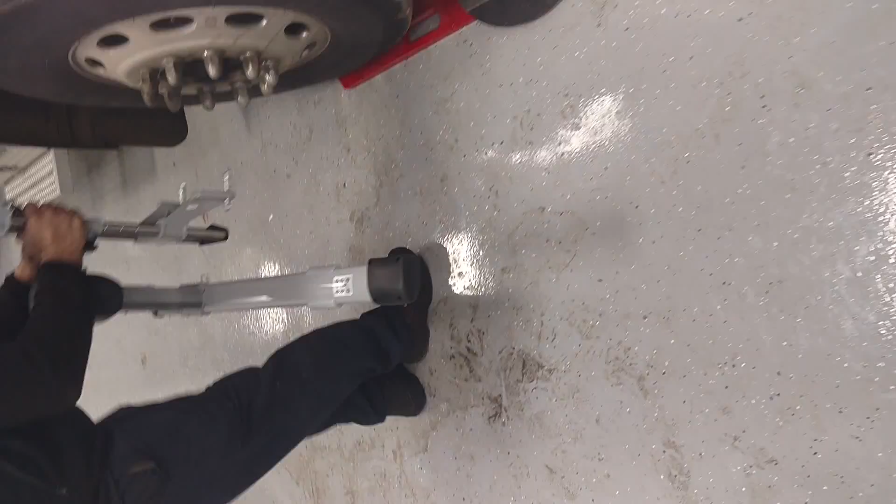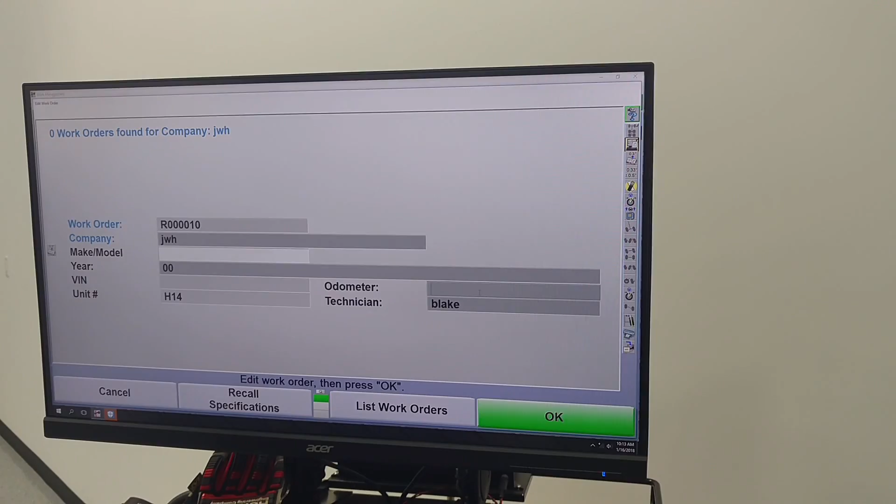The year you only put in 2 digits. You want... And you can put in the VIN number if you guys like to track VIN numbers. Most of my customers use the last 6 or the last 8, but it's not necessary. Just the dark gray is mandatory. The light gray is non-mandatory.

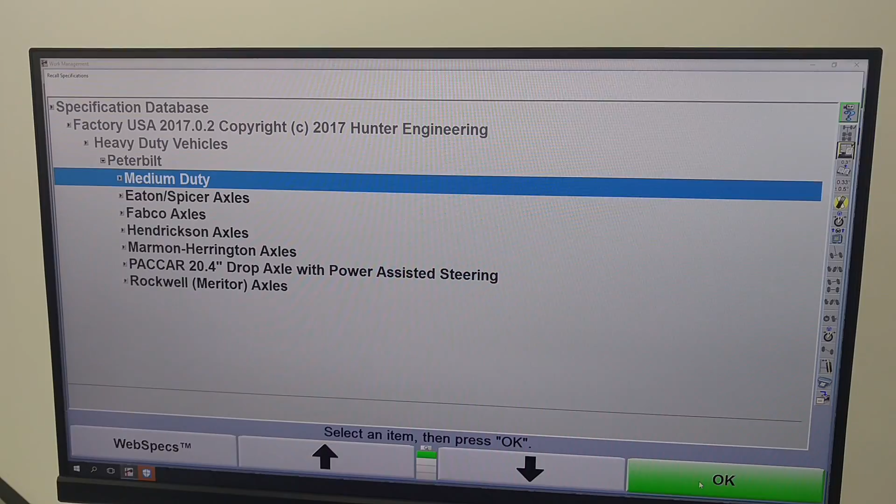So the space bar takes you to heavy duty vehicles. And then we click on that and we open it up and then we look for our selection. We're working on a Peterbilt, so we can touch P for Peterbilt, and then we just look for our axle code on the truck and open it up and choose the proper axle.

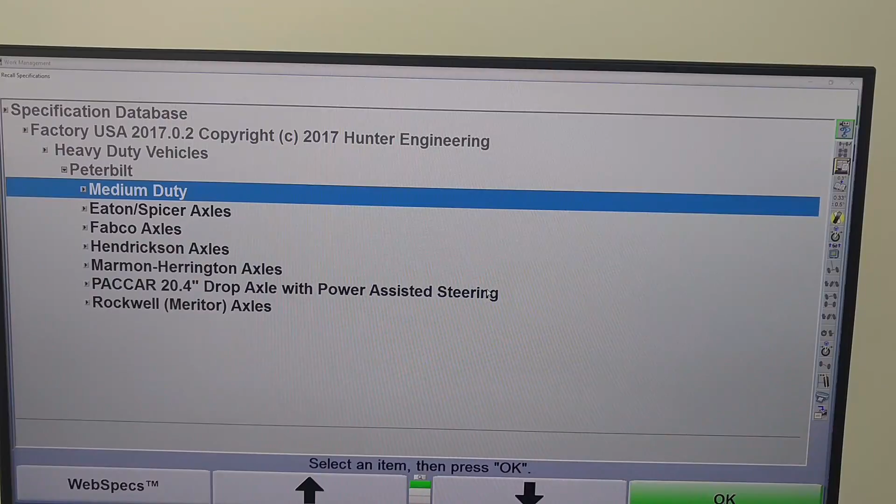On the older trucks, the tag was on the front axle out of aluminum riveted on there, and it stayed for a long time. But newer trucks now, they put paper tags, and they only stick around for a couple of years. So if you can't find the axle code, don't beat yourself up. Just pick the closest thing you can. The specs for toe are all very close.

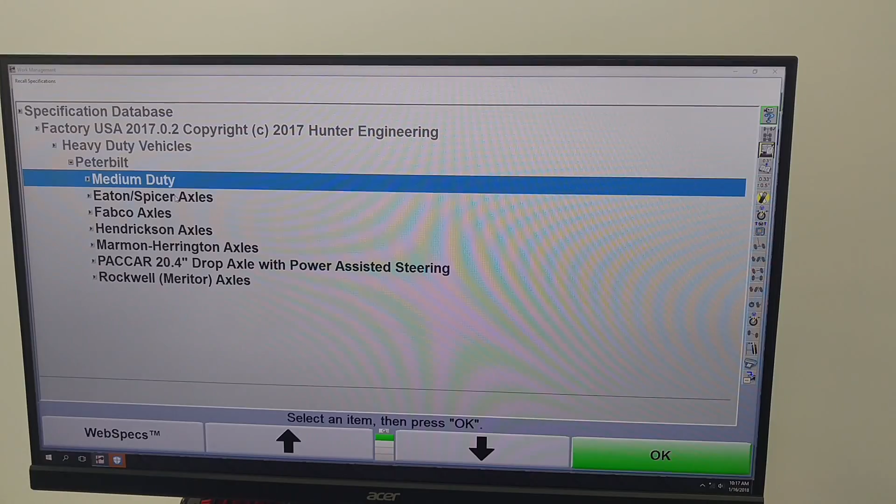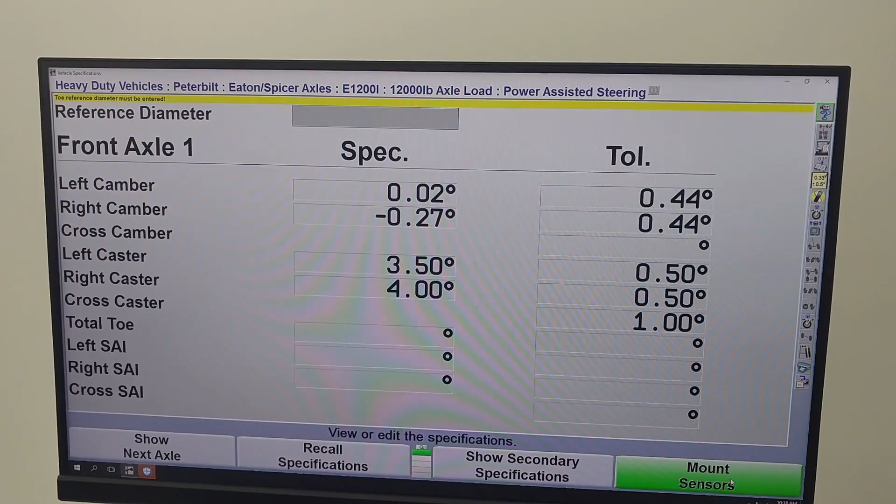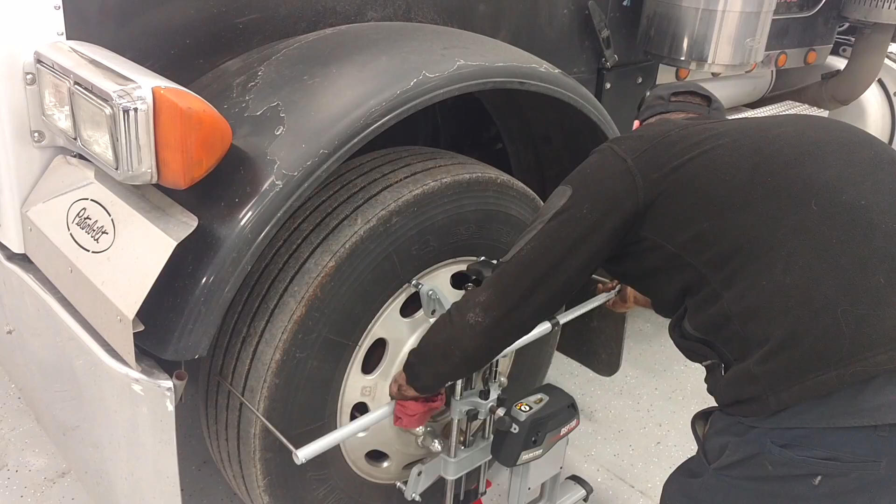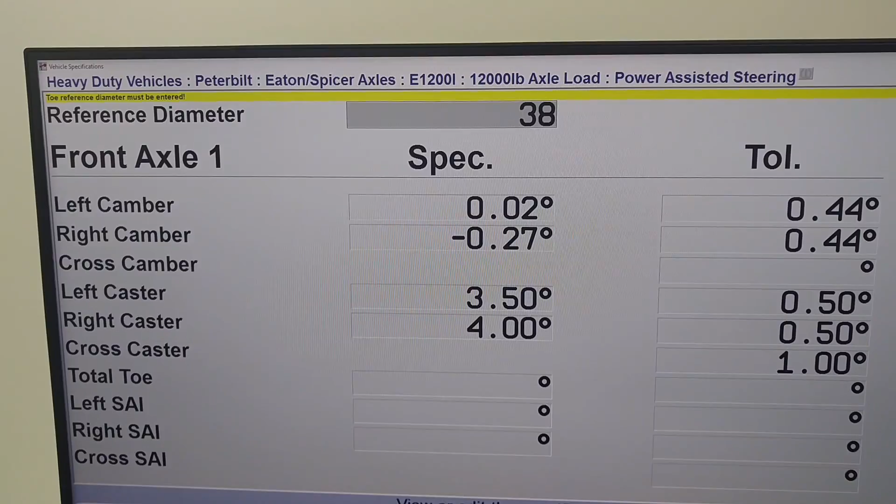Alright, so at the top of the screen we've got that yellow highlighted bar, and it says toe reference diameter must be entered. What we need to do is measure the diameter of the front tire with the tire measuring tool. So we're just taking the overall diameter of the tire with that tool. 37, 38. And then we enter that in that box, and you'll see that it populates the toe. It'll populate total toe when you hit enter.

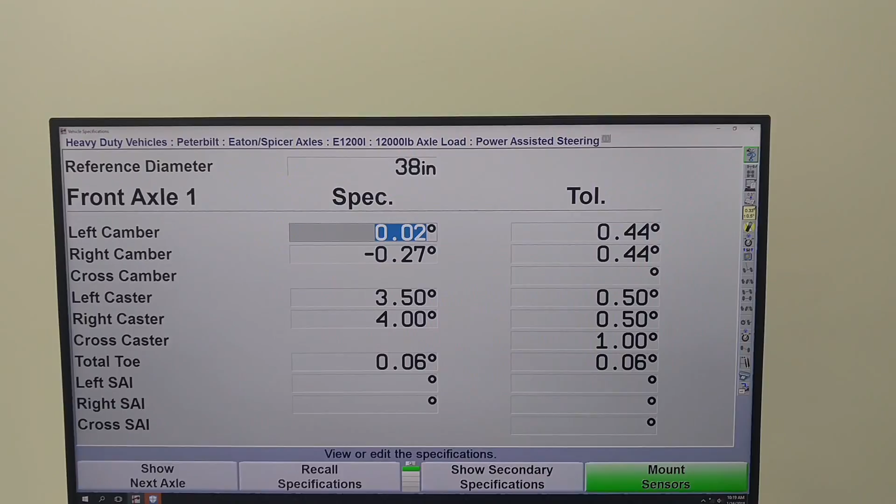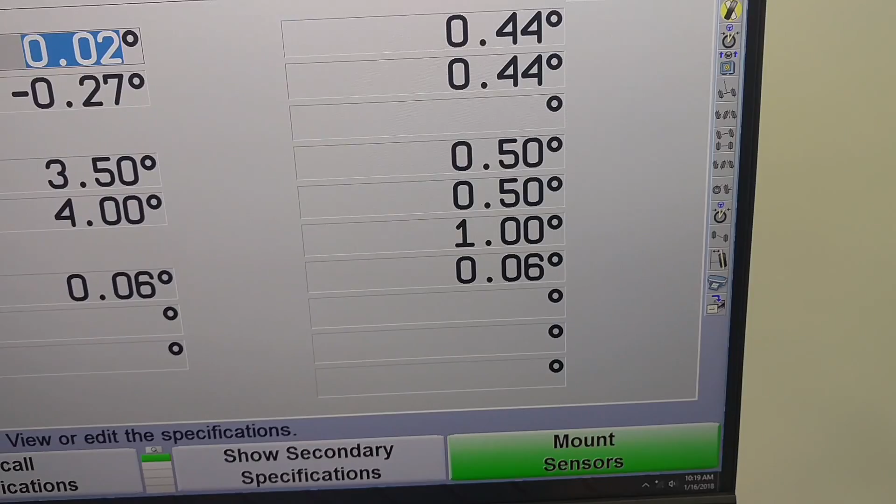So if you are ever doing an alignment and your toe spec is gray instead of red or green, it means that you did not do that. And you can go back up on the procedure bar on the right hand side of the screen, and you can go back up to show vehicle specifications or recall vehicle specs. Yeah, show vehicle specifications, and it'll give you an opportunity to enter that if you need to. Okay. So now you just go to the next box, which is mount sensors.

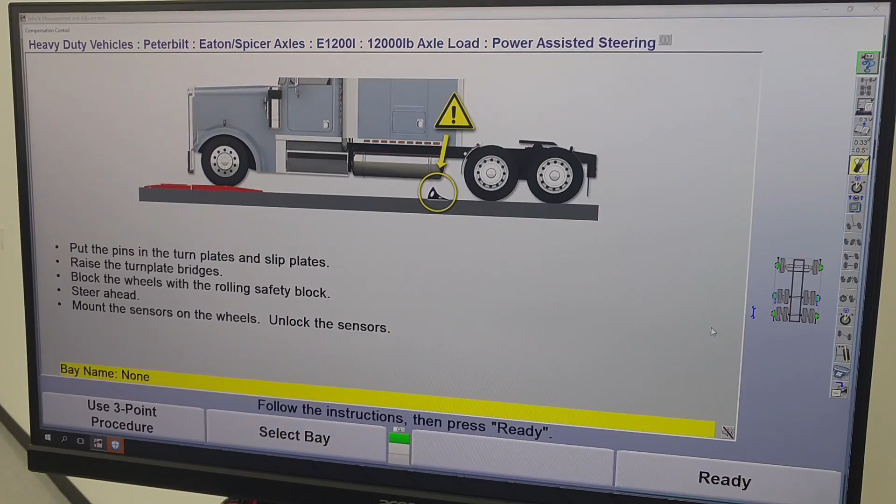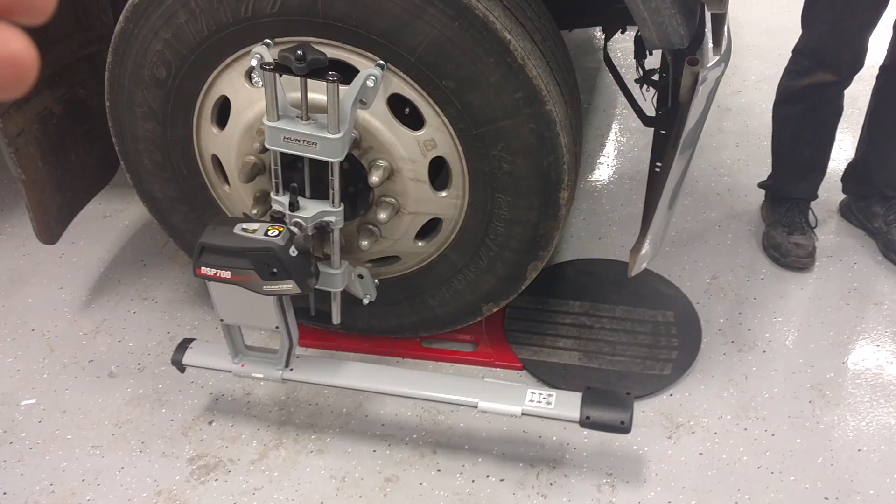And these particular turn plates don't have pins or turn plate bridges, but we make sure the wheels are steered straight ahead and the sensors are mounted, they're unlocked, powered up, and we drove the truck in and we centered the front axle at 22 inches back from the turn plates, which there's a black mark there that designates that. And then we hit ready, and that should give us 6 red bar graphs on the screen. And now we just need to roll the truck forward to compensate the sensors.

As long as they have to listen to your corny voice and not mine.

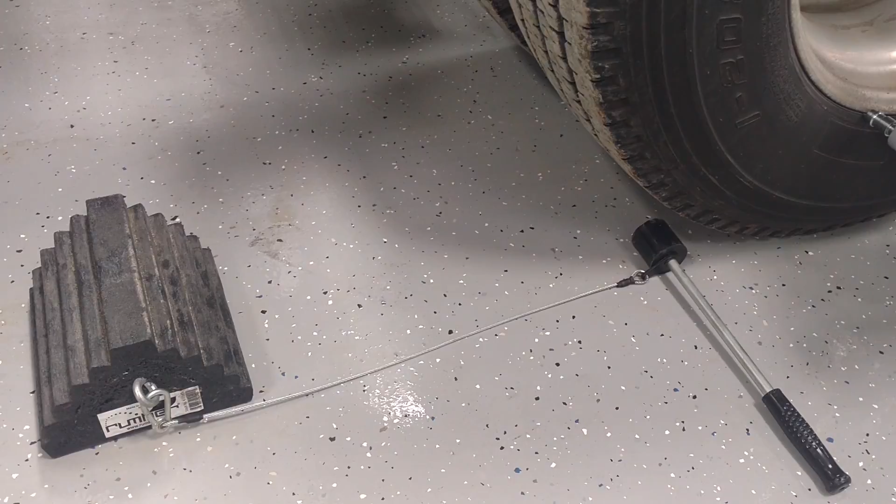So what we've done is we've spaced this wheel chock out at 22 inches using that little drumstick as a spacer. That gives us 22 inches of roll forward, and we just need to remove that wheel chock back there to let the truck move forward. Yeah. And being as we're down here a little bit, it may move. If not, just push it. Go ahead and push it, that way you can see it.

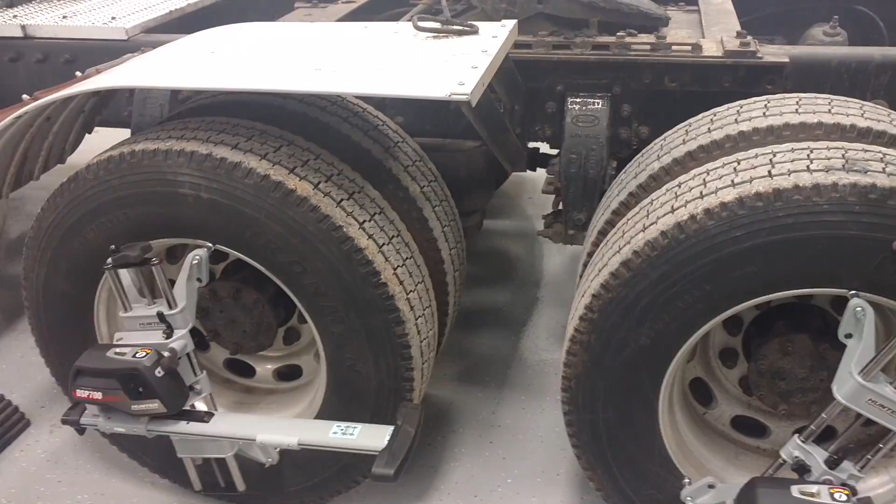So we roll the truck forward. Now we've got 6 red bar graphs that turn green. So we've compensated, and now we've got our numbers.

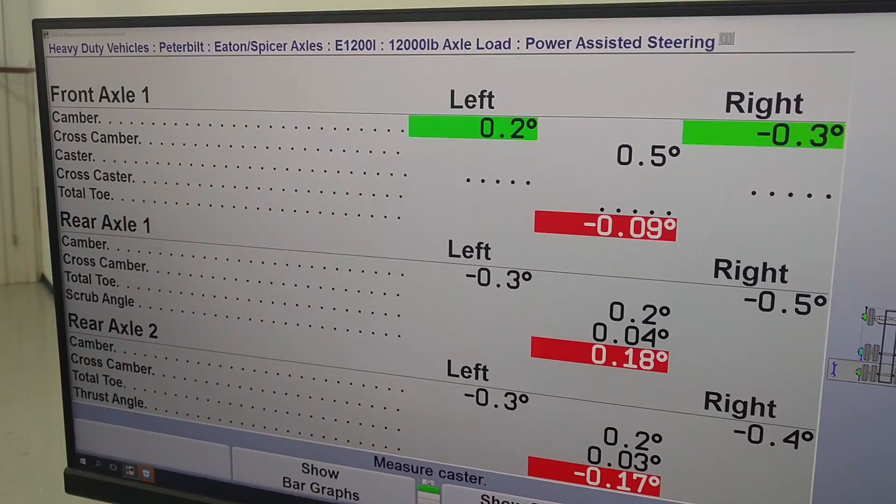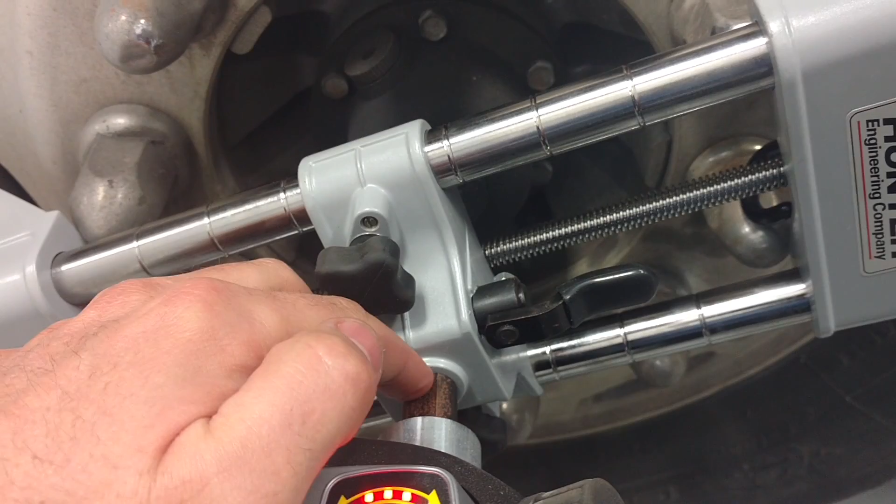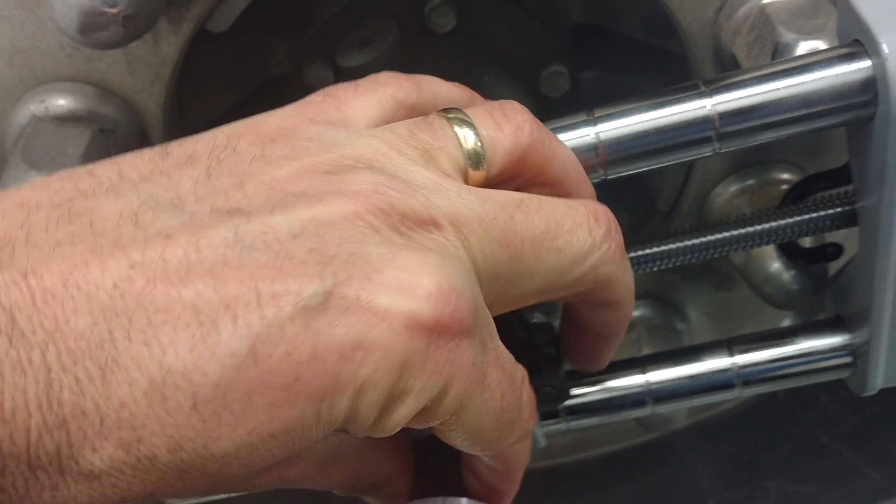Now, on that bar graph screen, if you ever get one that turns red and never goes green, chances are one of these sensor extensions into the casting is not tight. So it means this butterfly right here is loose, and this sensor shaft can rotate in there and it will not compensate. So you always make sure that these are nice and tight.

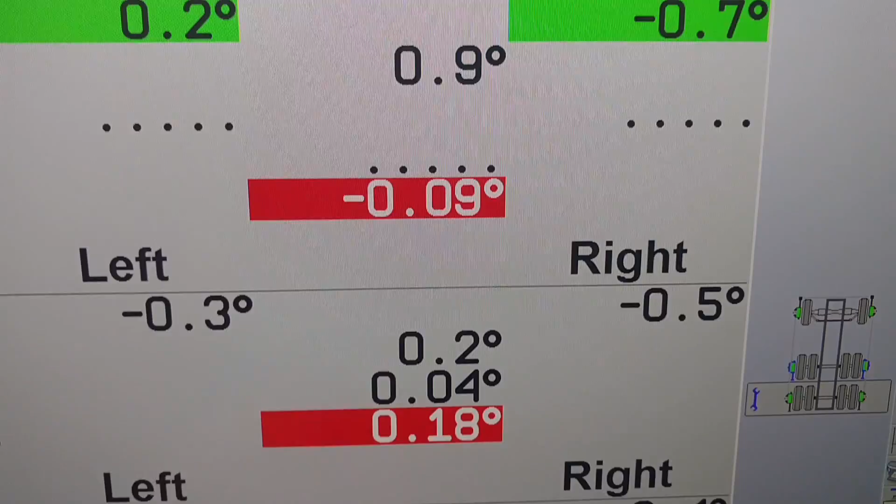So now we've got our numbers on the screen, and we've got thrust angle, scrub angle, and our total toe. Alright, and remember how I was telling you that scrub angle is referenced off of thrust angle, and if one is negative and one is positive, they will absorb into one another.

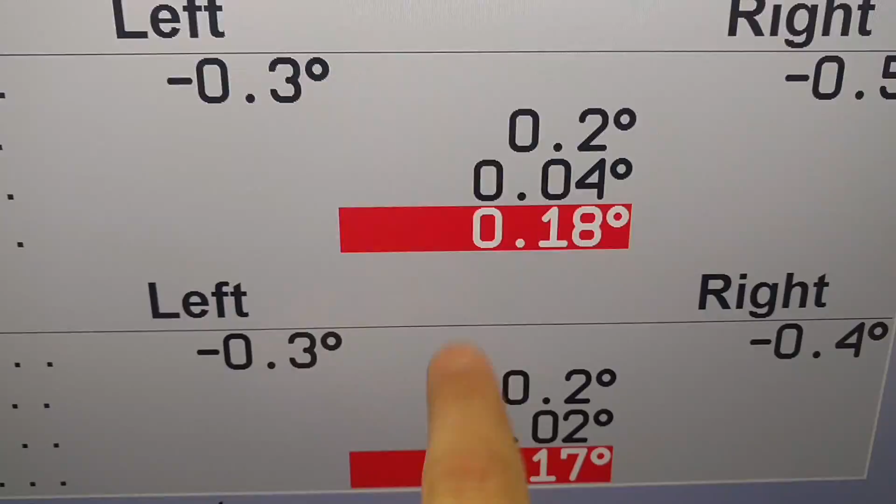So scrub is referenced off of thrust angle. So when you change thrust angle, you're going to change scrub angle also. So in this particular case, because this is a negative and that's a positive, when we fix this thrust angle, it's going to fix that scrub angle also.

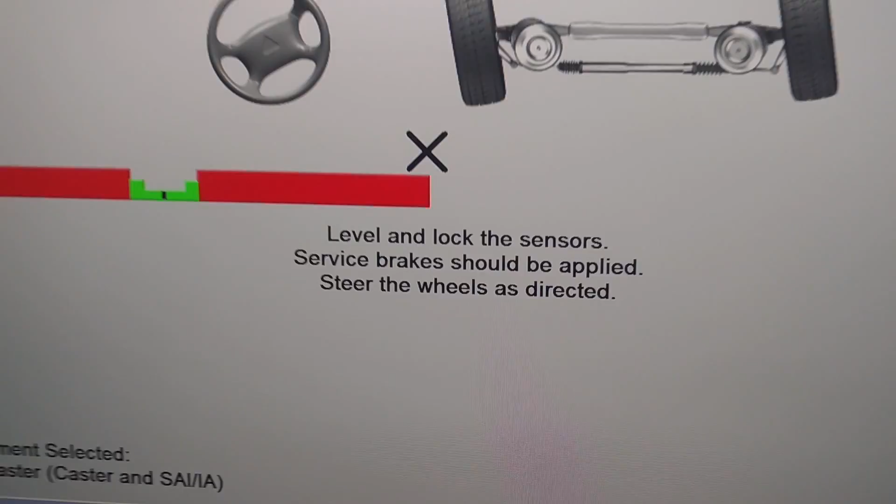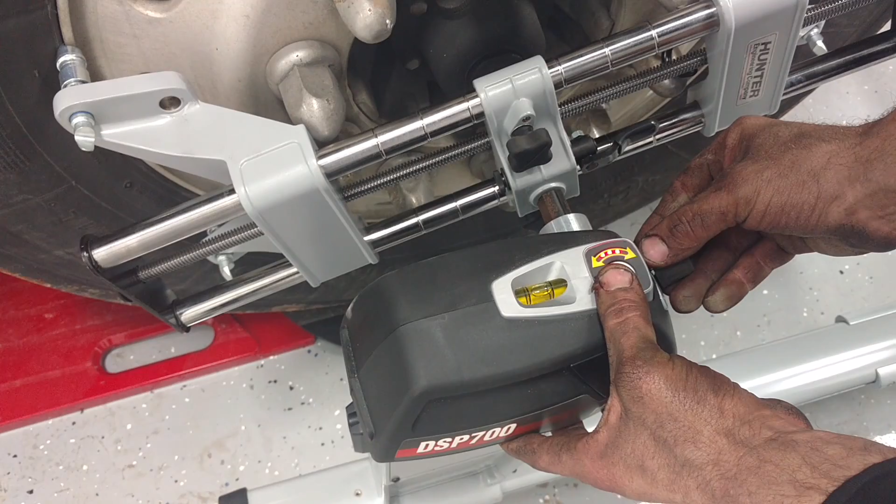So go ahead and hit measure caster. And the wheels were steered straight enough ahead that it's going to automatically take that, I believe. Yep. So now we just need to level and lock the front sensors and then steer for caster. Okay, so the wheels were steered straight ahead and it automatically took the first part of steering for caster. He's leveled and locked the front sensors.

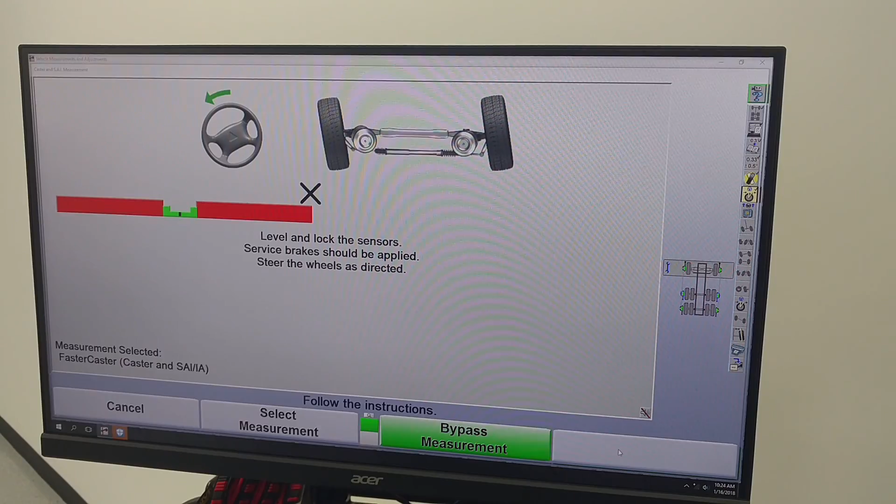So now he's going to go ahead and steer the vehicle to the left and get in the green bar graph. And that's about half a turn on the steering wheel. Just hold it in the lower part of the valley for a second. It'll take that measurement, and then we're going to move to the right about one turn of the steering wheel, and that will get the other bar graph in the green.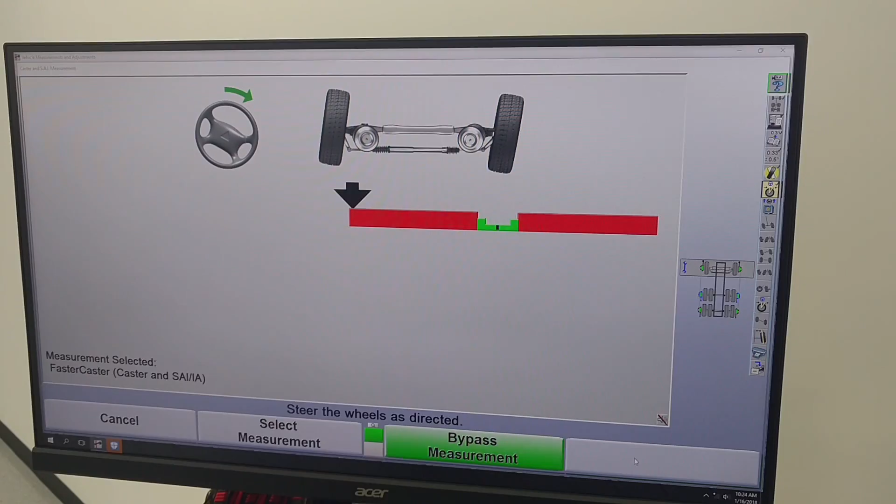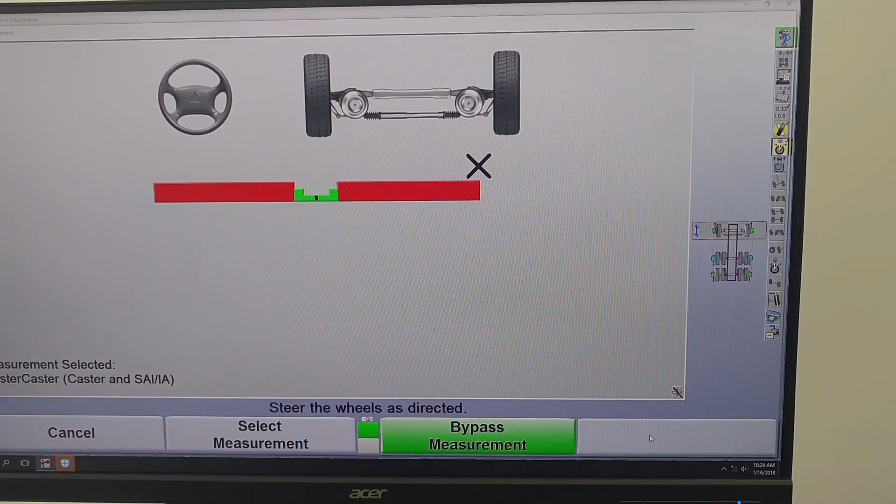And then after it captures that, we're going back on center. And this is very touchy. The machine is always about 2 seconds behind you, and you need to hold it in the lower part of the green valley for about 3 to 5 seconds, and then it'll measure and capture the caster.

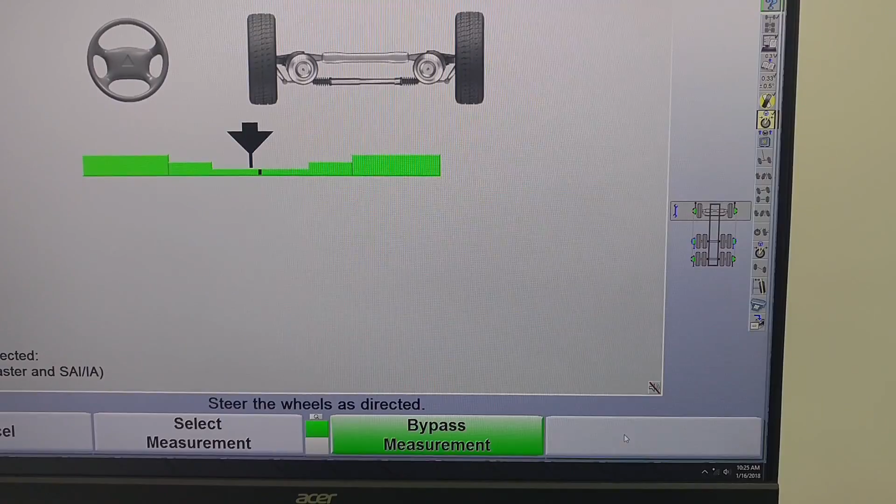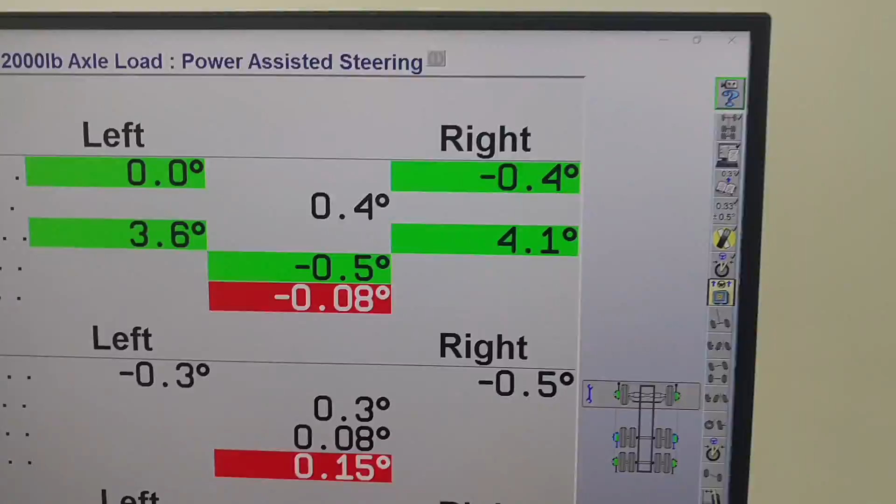So now we've got our measurement screen, and it shows our caster. We've got 4.1 on the passenger side, 3.6 on the driver's side. So we've got a perfect half a degree caster split, which will help this vehicle for road crown, because the truck will always pull towards the lower number caster if the caster split is over half a degree.

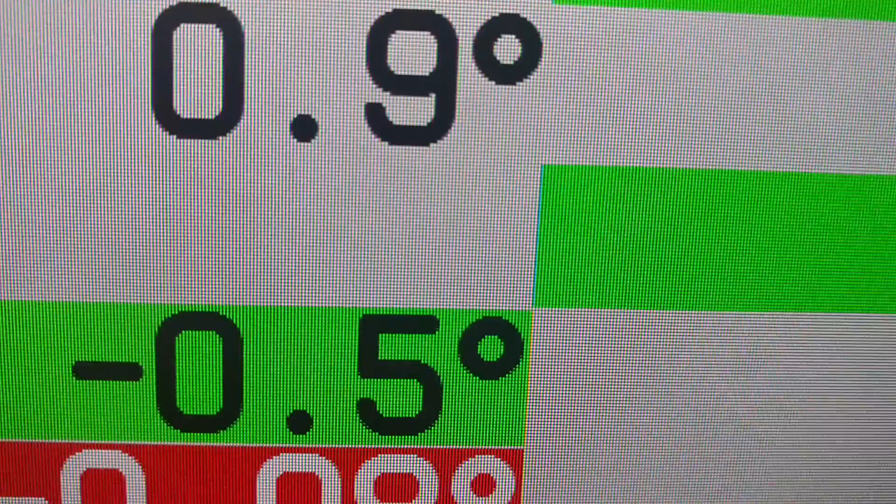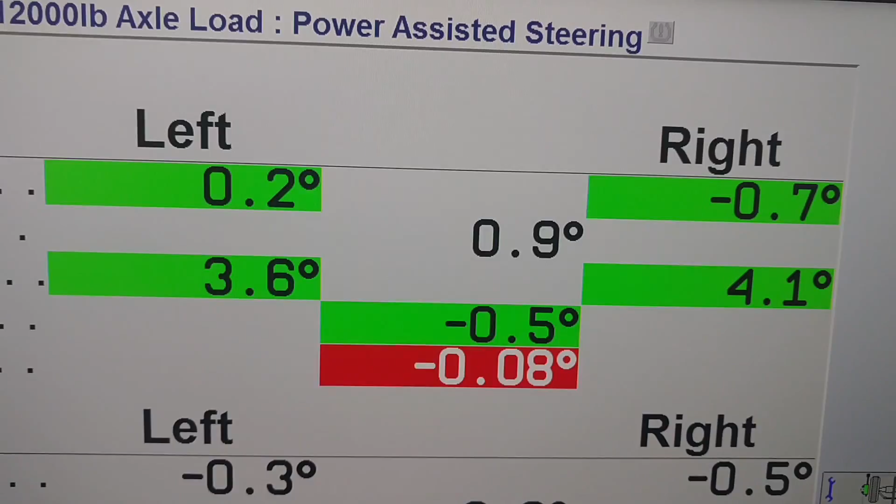And that's your caster split, half a degree, and that will help the truck up the hill for road crown. And in certain cases you may have to have a 1 degree caster split to keep the truck from pulling, but most of the time half a degree will do it. So now we click Save Before Measurements, and we can set our steering wheel status here if we want to notate if it was level before the alignment. So we hit ready.

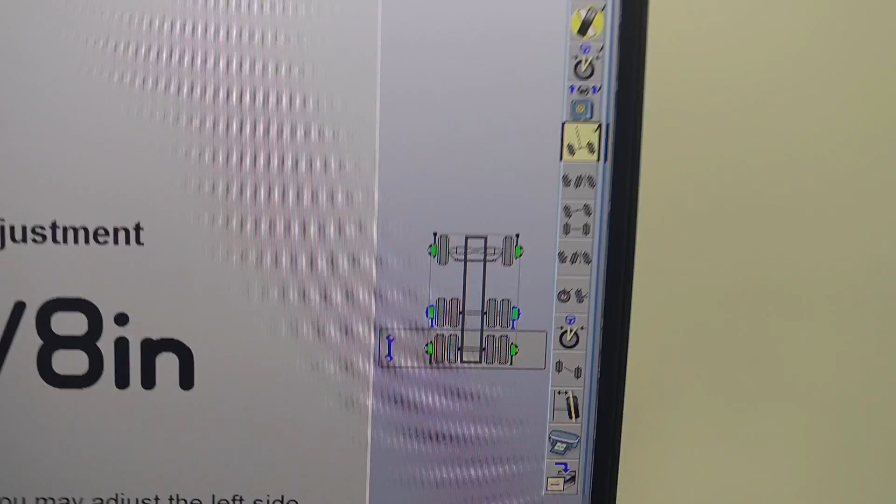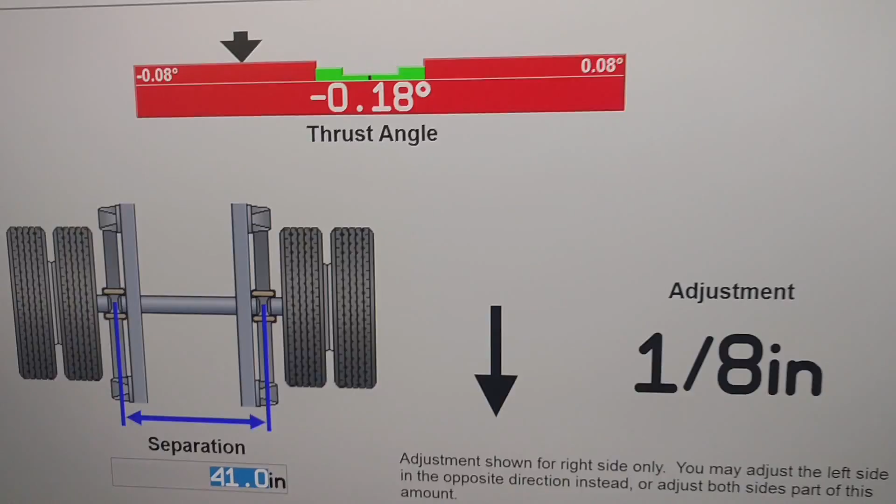And we've gone to thrust angle now, and we know we're working on that axle because of this highlighted gray box with the wrench next to it on the rearmost axle. So this thing has got negative thrust angle, which means it's on the driver's side, so the axle is pointing forward on the passenger side, well, about 1/8 of an inch. So we need to move this axle back on the passenger side, or that side of the axle has to come forward on the driver's side. And we would just look back on the truck to see how we make those adjustments.

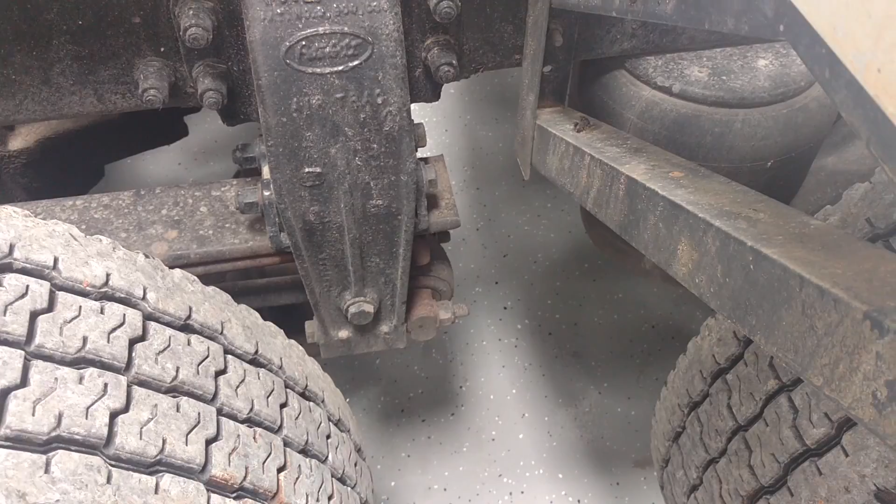Okay, so we've got negative 0.18 thrust angle on this. This is the passenger side, and we've got some washers in there that we can take out, which will be about 1/8 of an inch, and we can square up thrust angle on this truck. Did you guys measure that?

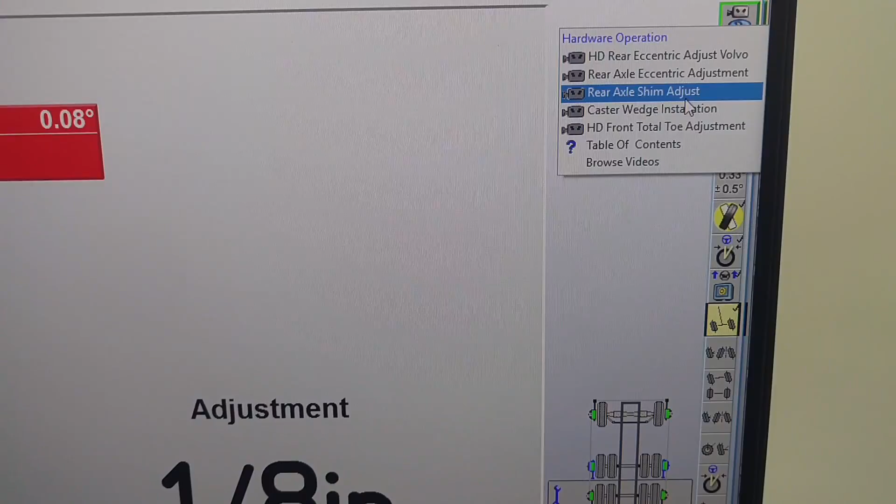Yeah, so now I've got browse videos at the top of the screen, so I hit that question mark, and I can come down to rear axle shim adjust, and this will show a video of how to adjust that rear axle.

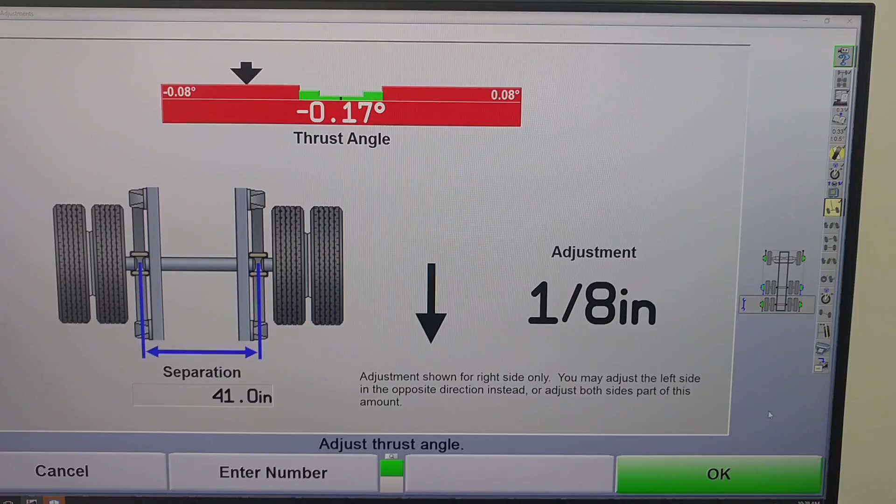Alright, and one thing I do want to say here, when you make that adjustment, if you make more than 1/8 of an inch adjustment, you definitely want to jack that rear axle up and get both tires off the ground and relax it and set it back down, because with the tires on the ground you won't get all the movement of the axle. You'll gain another 2 to 3 hundredths just by jacking it up and setting it back down.

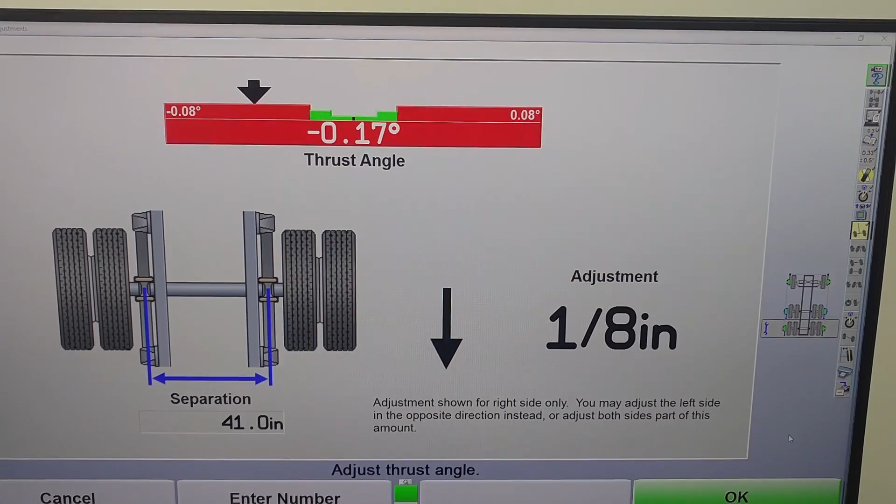And one other thing I'll mention with that is, for y'all that have a tight turn into your alignment bay, it's important that the truck be straightened out before you do the alignment on it. So you may have to back it up as far as you can and get the axles in the forward running position just like it goes down the road.

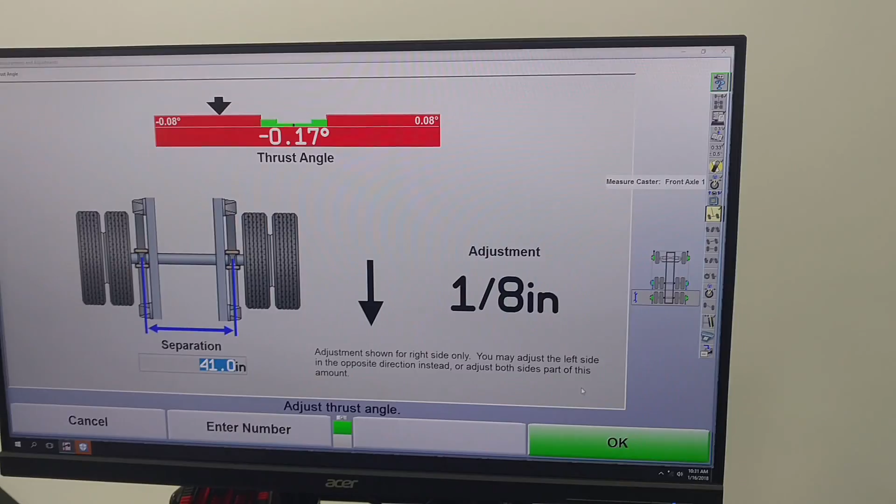So once we would make the adjustment, that would turn green and we would look for like 0 inches, and then we would hit OK, and we're going to go to the next screen, which is camber and toe numbers on that rear axle. And it's very important on rear axles that the total toe is what we're looking for. We can identify a bent rear axle, and the total toe number at 0.50 or higher would designate a bent rear axle, and that thing will be a tire eater until it's replaced or straightened out.

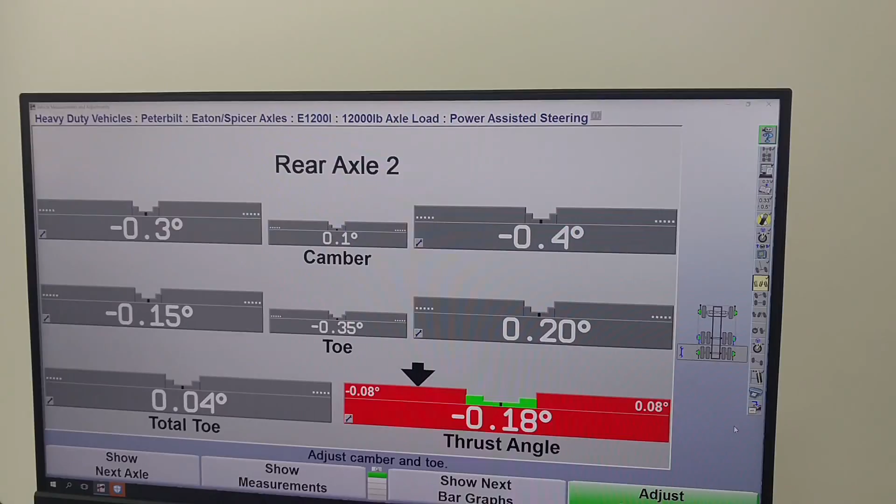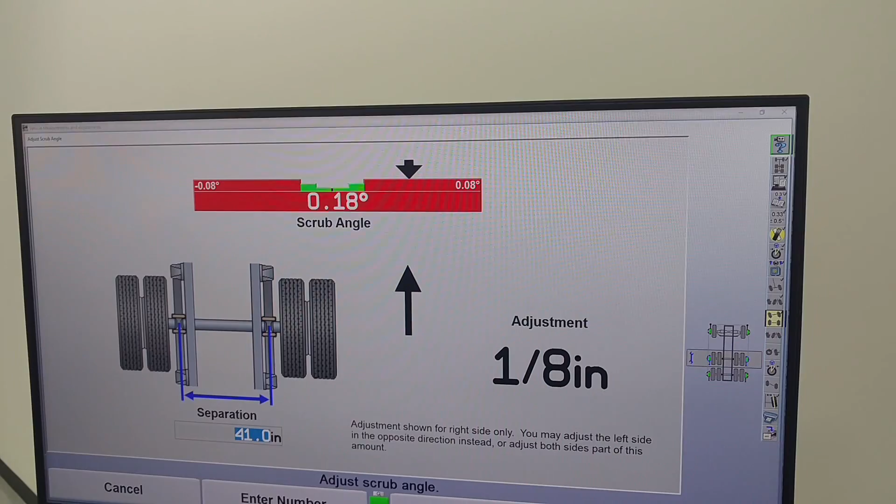So now we hit adjust scrub angle, and we would make the adjustment needed here. This is showing passenger side needs to go forward 1/8 of an inch, so we would put shims in that passenger side, or we would take shims out of the driver's side since it's a shim forward suspension.

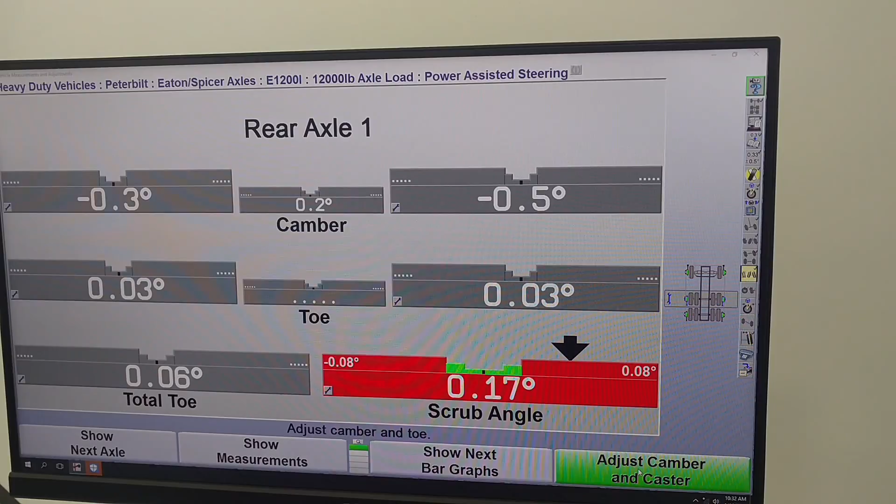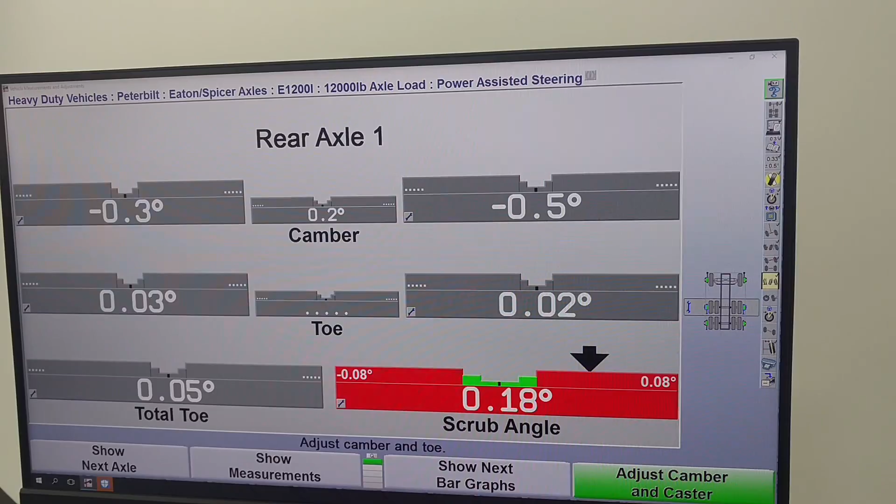So now we hit OK, and we are at our total toe screen again, camber and toe numbers. We've got 0.05, which is great. 0.50 is our threshold for total toe, and we just moved to our adjust camber caster screen then.

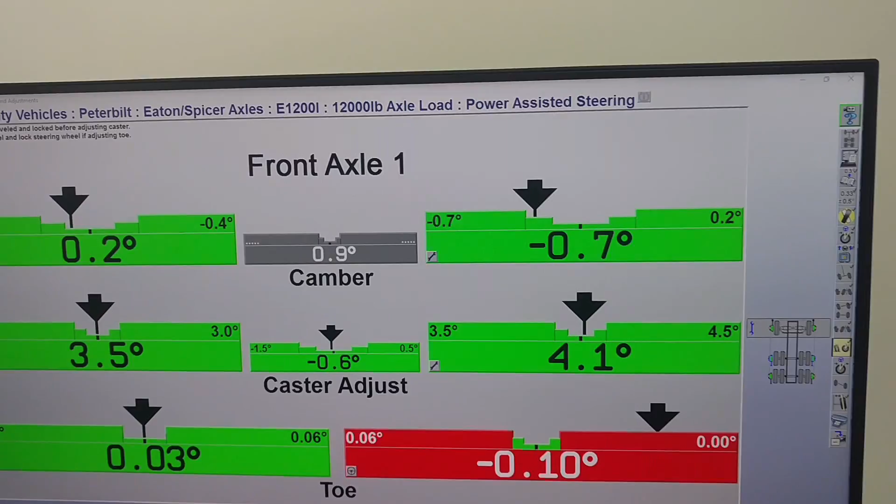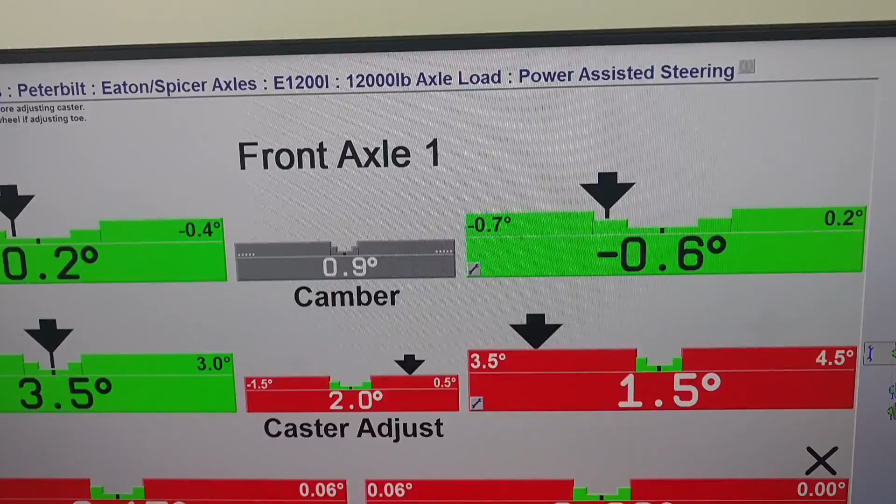And on this screen, this is where some guys make some mistakes. These are not your caster numbers on the screen where it says 3.5 and 4.1. If I go over here and rock this right front sensor, look what happens to your caster numbers. They go all over the place, okay? Those are not your accurate caster numbers. You have to go down to F2, show measurements. Those are your actual frozen caster measurements. So don't make that mistake on the adjust camber caster screen.

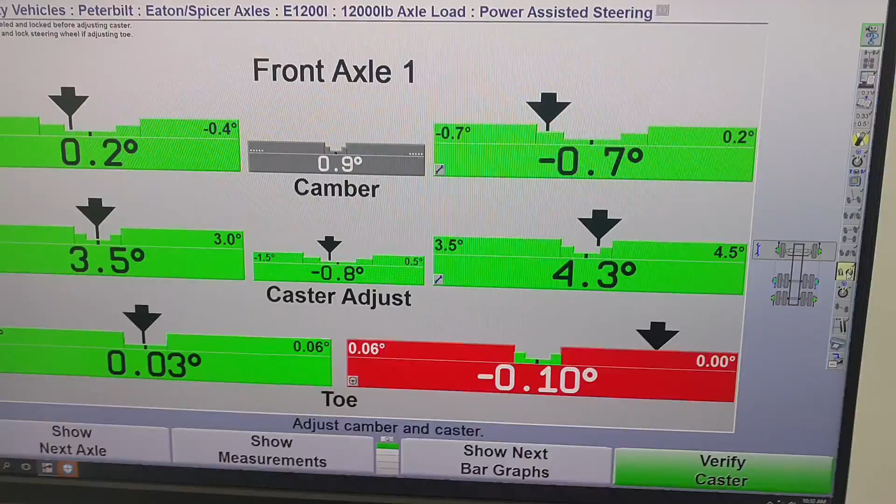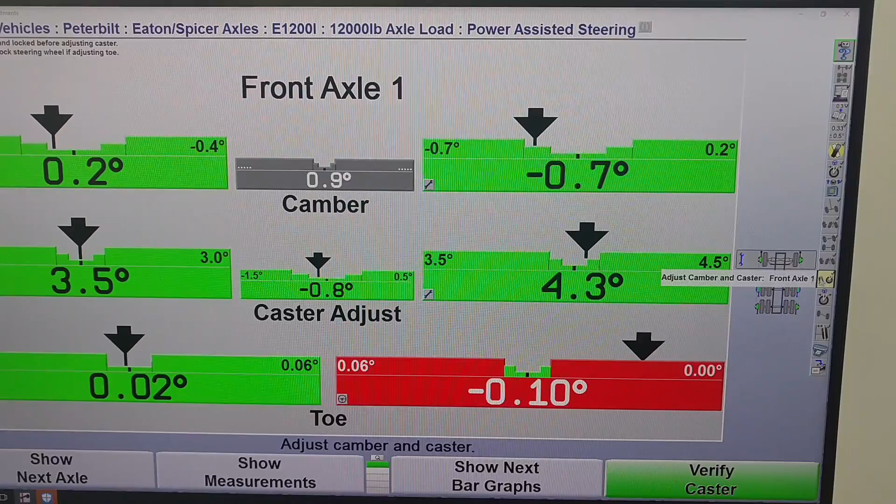Now verify caster is on the screen. If we made a caster adjustment, we would have to re-sweep that. And we did not make a caster adjustment on this truck, so we're going to hit verify caster and then bypass the measurement.

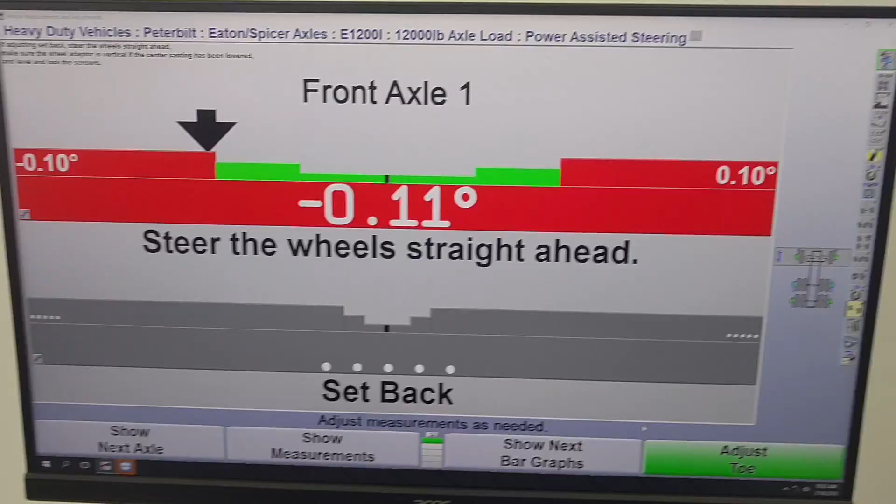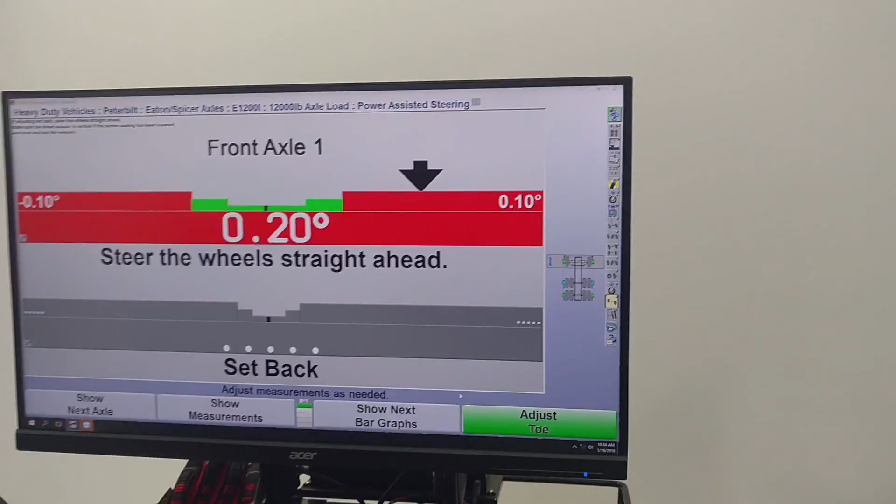And now we're on our adjust axle setback screen. So the steer ahead on this is still off because we did not adjust thrust angle for this video. So we're just going to bump the wheels a little bit to the right. And, whoa, too much. Yeah, just knocked me in a little bit. Alright, so we're in the green to where we can see our axle setback number.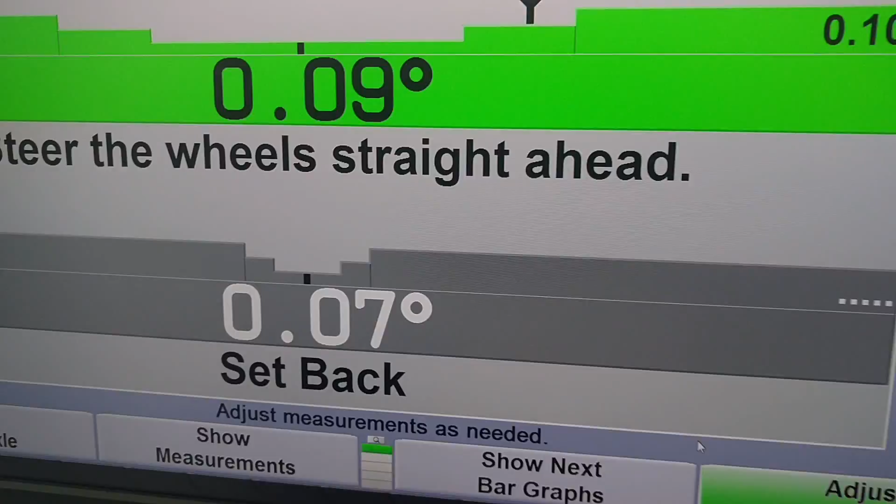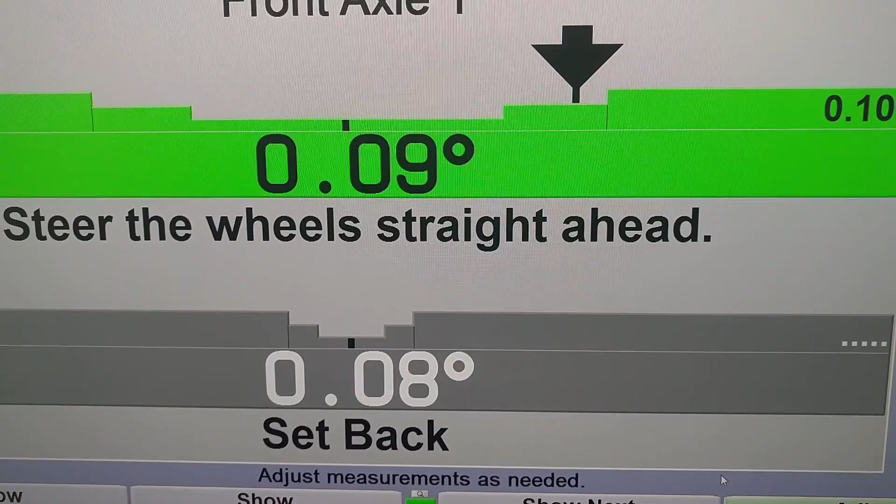This particular truck's got positive 0.08 setback, and setback is extremely important compared to geometric center line. If the setback is off by more than 0.50, the truck is going to pull in the direction it's pointing, which in this case is positive, which is the passenger side of the truck; negative is the driver's side. So if that was bent, you would get under there and look for loose U-bolts, the center pin to be broke off, or the front axle has been in an accident or something like that.

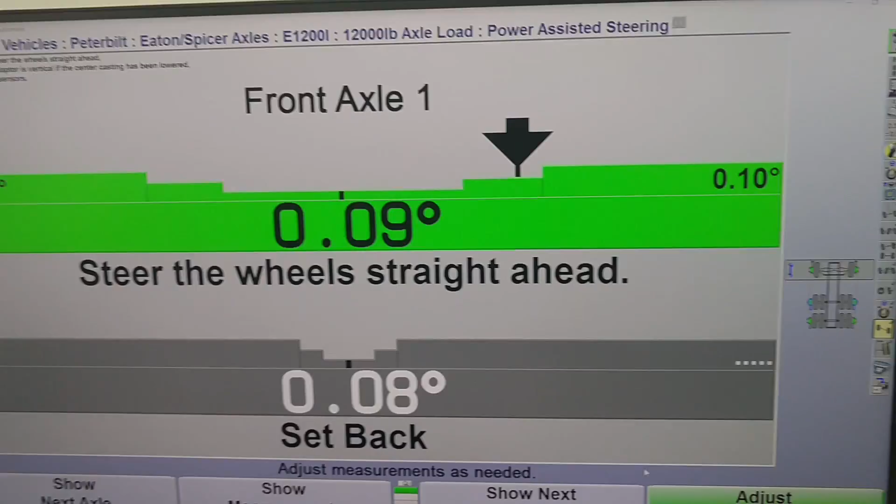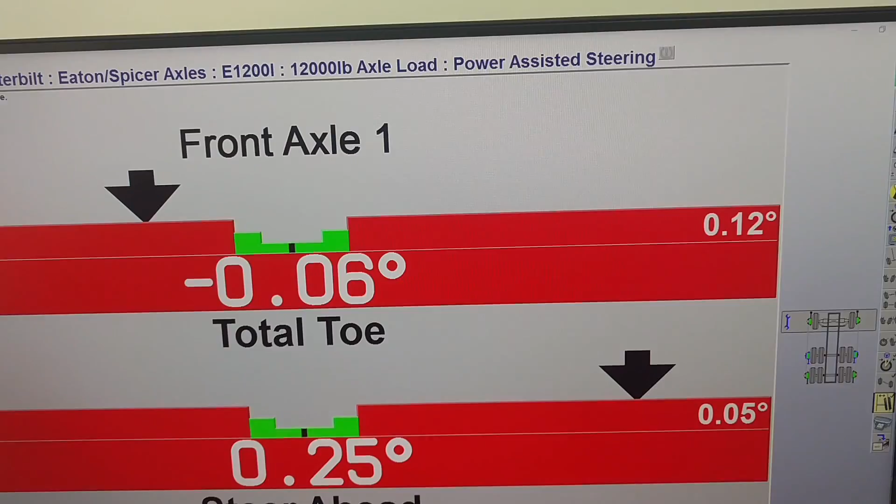So now we're going to hit adjust toe. And in this case, the toe on this truck is negative, which is typical for a road tractor that's gone through a tire cycle. They have a tendency to go negative over time as the suspension components wear. So this is typical of what we would see with a full life cycle. So this truck needs to be adjusted positive, and we would make that adjustment under there.

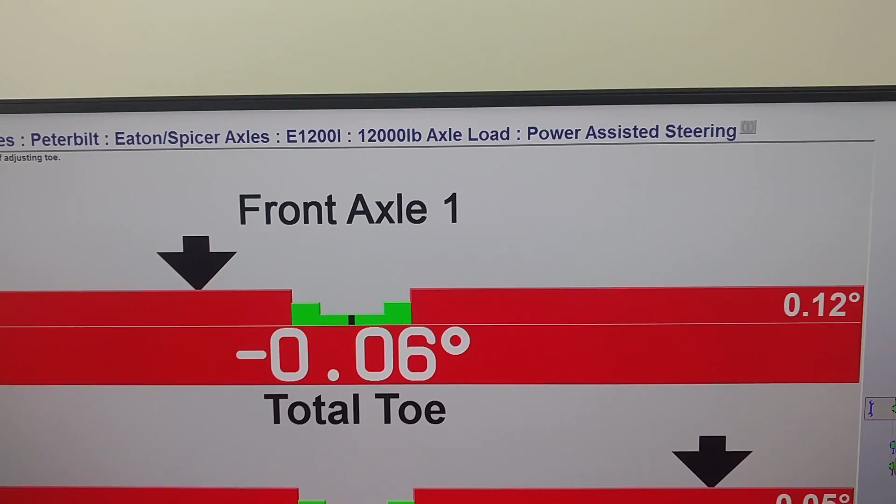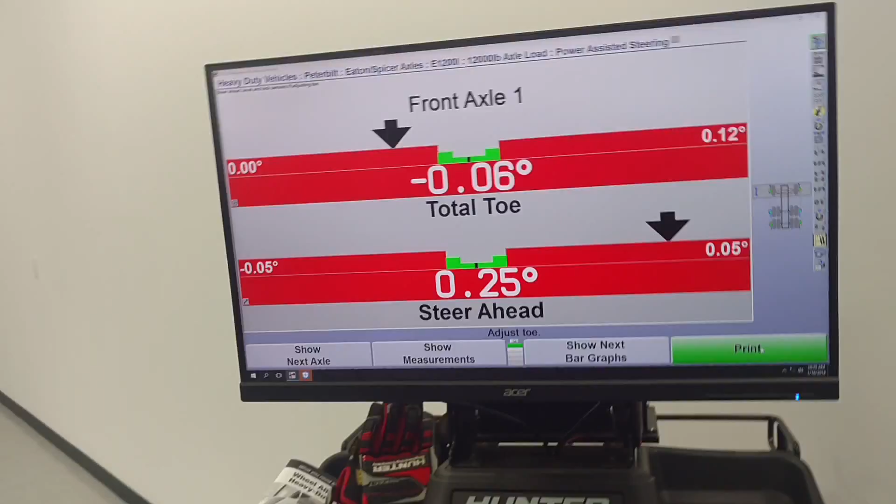Most of the time it's a 15/16 and an open end wrench, and get a pipe wrench under there and move your cross tube to adjust that toe until you get the arrow in the middle of the screen. And when you're adjusting toe, when you finish, you want to have steer ahead as close to 0 as possible, because that can affect your toe number. So we like to get that steer ahead a little closer.

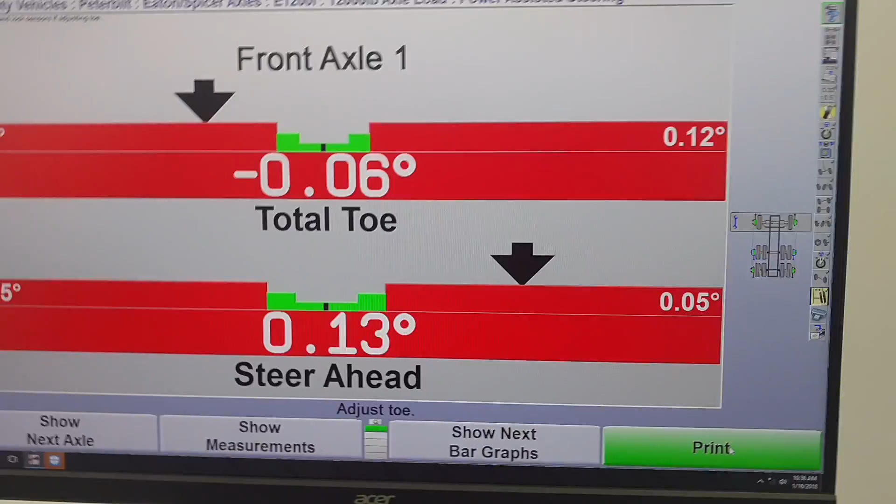That's what I get for trying to do videos at the same time. This one steers a little better. Go ahead and get it right, and then I'll pick it back up.